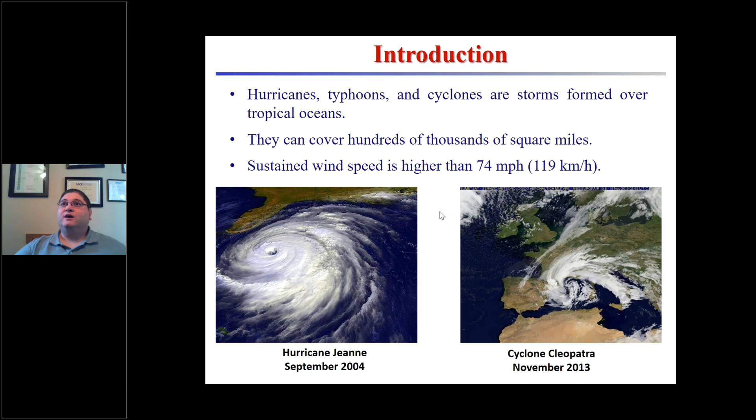Just a little bit more background. In order for hurricanes to form, we need to have warm ocean waters with a temperature of at least 78 Fahrenheit. They need to be at least 5 degrees north or south of the equator. There has to be low vertical wind shear, and a lot of moisture, because the moisture is what produces the fuel for the hurricane in order to gain strength.

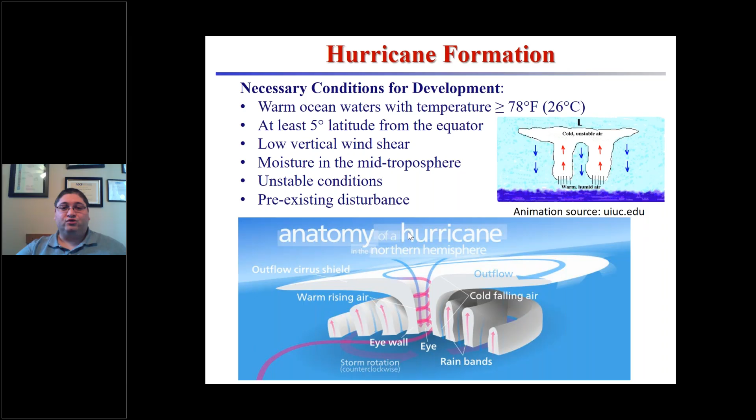There also has to be some initial disturbance and instability in order for the wind and the moisture to get enough structure to start rotating and producing what we know as a hurricane.

In terms of classification, hurricanes are generally classified using the Saffir-Simpson hurricane scale, which divides hurricanes into 5 different categories based on the maximum sustained wind speeds, going from 1 to 5, from lower strength to higher strength.

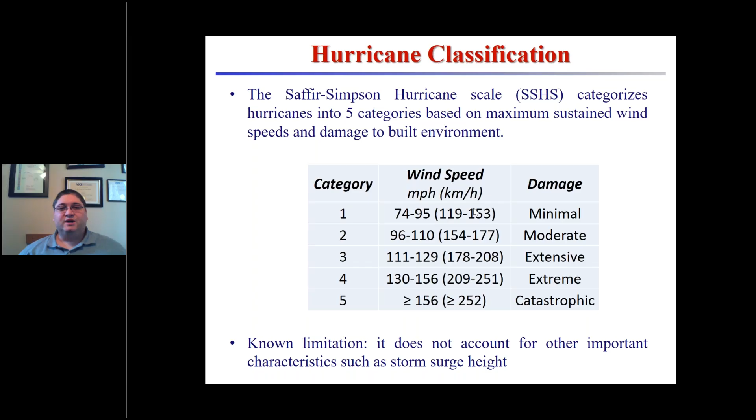One of the known limitations of this classification is that it's based only on wind, but a lot of the damage and danger coming from hurricanes is actually due to the storm surge and the storm surge height, which can produce flooding.

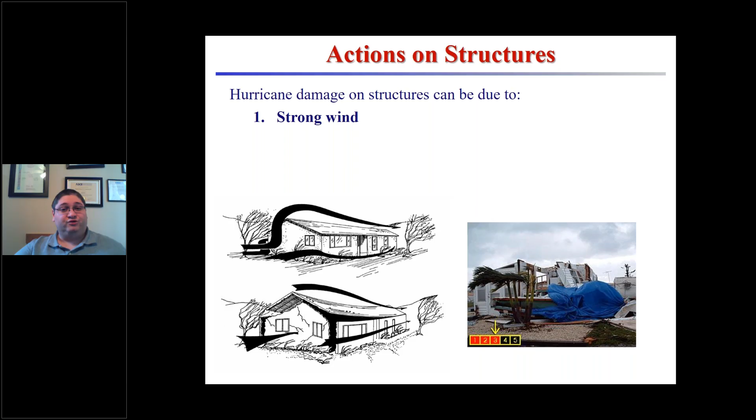So what are the effects of hurricanes on buildings and structures? There are several ways in which hurricanes act on structures. Obviously, we have the strong winds that produce strong pressures on walls and roofs of buildings. This pressure produces forces and moments, and can produce structural damage or also non-structural damage on the envelope.

Then there is the damage produced by windborne debris and their impact on the structures. Obviously there is penetration of windows, doors, garage doors, but the other important effect of windborne debris is that once the envelope of the structure is breached, we change the pressure distribution inside the building, and that completely changes the load path of the forces on the structure. If the structure was not designed for this new load path, we have failures.

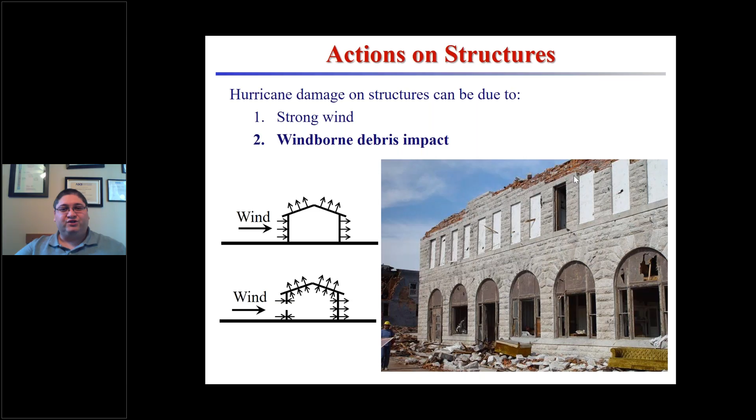Like in this picture, you can see that there was breaching of all of this glazing from the windborne debris, but then that produces the roof to blow off due to the change in internal pressures.

The other very dangerous component of hurricanes is the storm surge, which can produce flooding. Usually flooding is the issue that is most dangerous in terms of life losses, because if someone didn't evacuate and is having flooding in the streets, then they are literally stuck in the house, which makes it extremely dangerous for their survival.

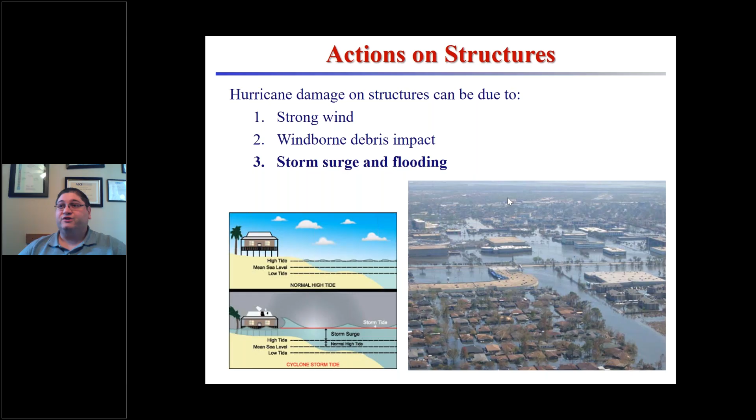And finally we have rain, which per se is not really dangerous in terms of life losses, but is one of the major sources of losses in terms of content and the interior of buildings. Once you have water inside your house, you are pretty much obliged to tear it down and rebuild it from scratch.

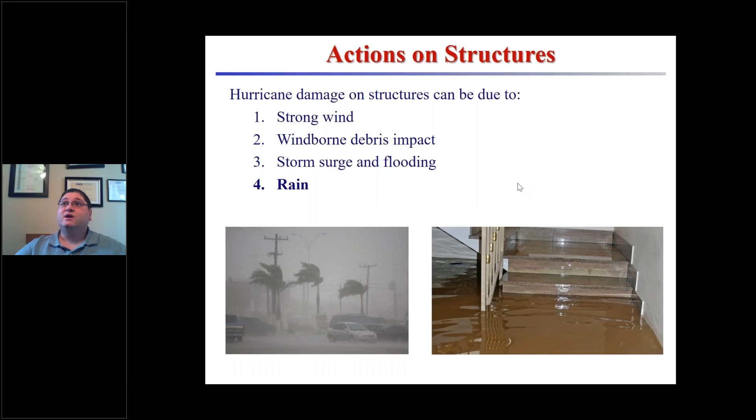So in order to assess the performance of a structure, we really need to consider these 4 different hazards that are interacting. On the other side, we also have quite abundant knowledge in terms of approaches for performance-based engineering. Obviously, performance-based earthquake engineering is the most well-known and the first performance-based approach developed for structural design and assessment. But then performance-based blast engineering, performance-based wind engineering, and performance-based fire engineering were also developed with similar characteristics, and performance-based fire and wind engineering are now accepted in design codes and ASCE 7.

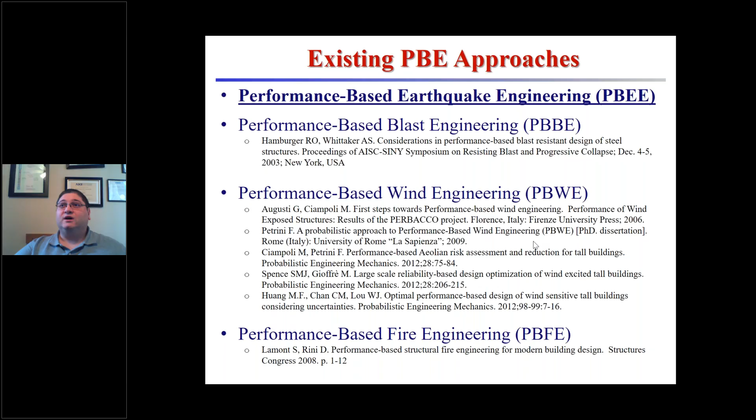In fact, very recently, less than 2 years ago, we had the first pre-standard document for performance-based wind engineering, and this document goes through the different methods of analysis that can be used to apply performance-based wind design, the definition of R modification factors, and how and when to use them. This document will actually be called directly in the ASCE 7-22 version of the code for load calculation on structural, building, and non-building structures.

So there is a lot of interest in having a methodology for performance-based wind design and performance-based hurricane design. And that's really the motivation and the objective of my research in this field.

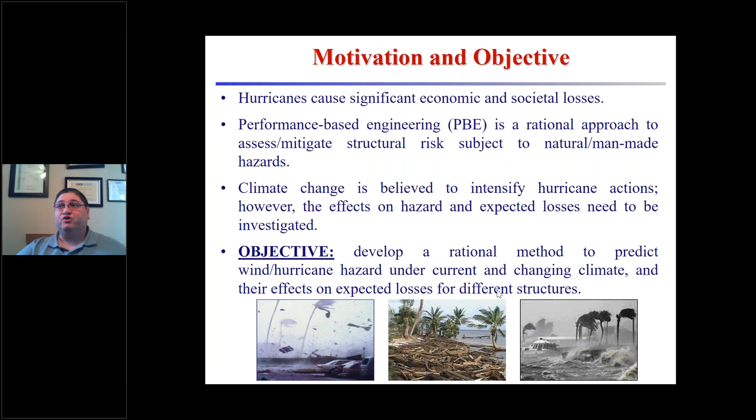We know that hurricanes produce significant economic and societal losses. On the other side, we know that performance-based engineering has been very successful as a rational approach for the assessment and design of structures subjected to different types of hazards. So the idea is to put them together and develop this performance-based hurricane engineering framework, which also allows us to include other effects like the effects of climate change, when the hurricane actions are expected to intensify in the next 30 to 50 years. And we need to have a methodology to actually evaluate, assess, and measure what that would imply in terms of losses on our built environment.

The methodology for performance-based hurricane engineering is based on, or inspired by, the Pacific Earthquake Engineering Research Center performance-based earthquake engineering framework, shown here in its mathematical form. This approach is really an application of the total probability theorem, a divide and conquer approach in which the difficult task of making a design based on the performance of the structure is broken down into simpler and independent steps: hazard analysis, structural analysis, damage analysis, and loss analysis, that are able to incorporate the effect of uncertainties in each of the different steps, and also allow different expertise to be used in different parts of the analysis and design.

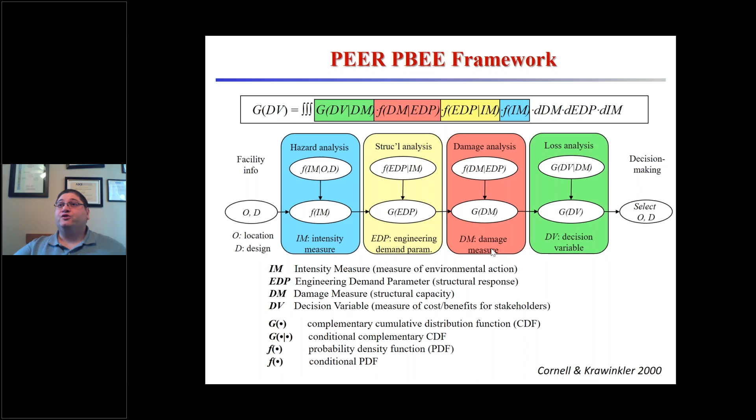So what are the differences then between the proposed performance-based hurricane engineering and the existing performance-based earthquake engineering methodology? The commonality is that they are both based on the total probability theorem, so we still want to break down a difficult problem into more tractable, smaller problems.

However, hurricanes are by their nature multi-hazard scenarios. As we have seen before, you need to include the effect of wind, windborne debris, storm surge, and rain, and they have different ways of interacting with one another. Also, we want to have a methodology that is consistent with the already existing performance-based wind engineering framework. It should actually be a generalization, because wind is one of the hazards within a hurricane, and we need to be able to include these different hazards that are interacting.

For the specific case of hurricanes, we have synchronous hazards—they are happening at the same time—and we have cascading hazards, or hazard chains, where the damage produced by one of the hazards can change the risk associated with one of the other hazards. So we need to have something that is able to model this in order to really consider the effect of hurricanes.

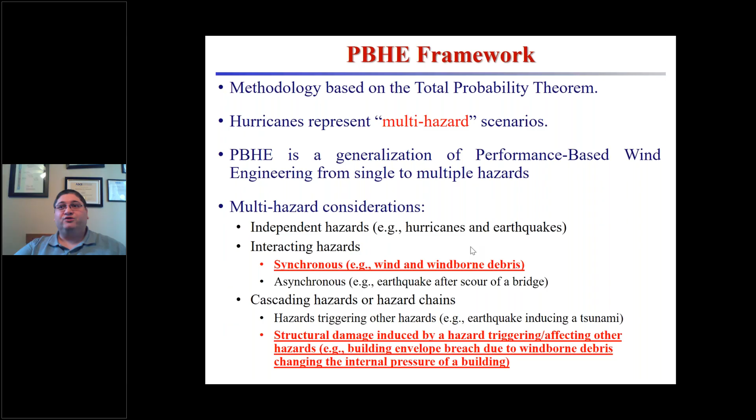The mathematical formulation is maybe a little bit scary because mathematically it's a quintuple integral of all of these functions. But if we break it down into their components, we see that it's really very similar to the performance-based earthquake engineering methodology that already exists, in that we have structural analysis, damage analysis, and loss analysis that bring us to making design decisions. The differences are in the first part of the methodology, the hazard analysis, where obviously we have to consider this interaction among the different hazards. And then we have two different steps that were not in the original performance-based earthquake engineering methodology: the structural characterization and the interaction analysis.

These are typical of wind engineering analysis of structures. The structural parameters identified during the structural characterization are those mechanical parameters, or parameters representing the characteristics of the structure, that have an effect on the loading that the structure is seeing—things like natural period, pressure coefficients, shape of the building. These are all parameters that change the load applied on the buildings when you have the same characteristics for the wind.

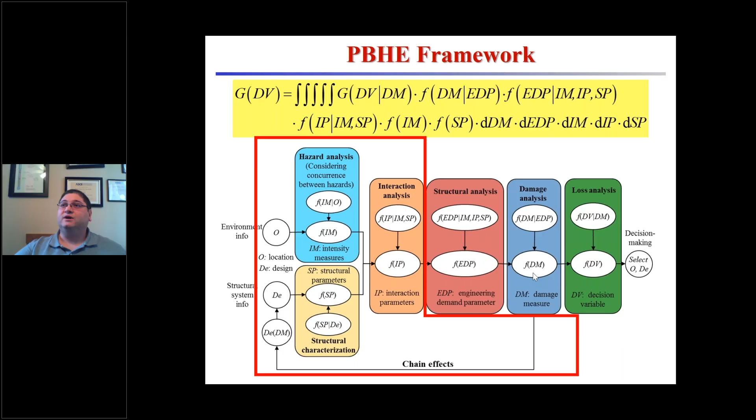And so that's really the mathematical formulation of the methodology that then needs to be implemented. For the examples that I'm presenting in this presentation, the implementation is a multi-layer Monte Carlo simulation, which is a combination of stochastic simulation to implement the variability of the different parameters, followed by analysis steps where deterministic models like windborne debris trajectory analysis, or finite element models of the structures, are used to propagate the uncertainty from one step to the next.

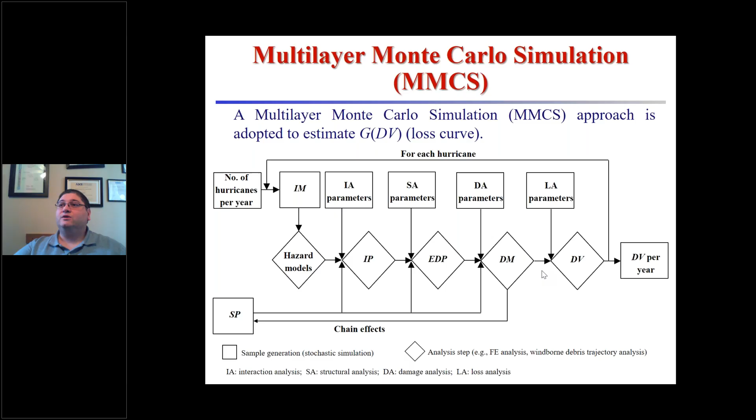Given this general formulation, I want to now show how it is applied in practical usage for structural design. The first example is the performance-based comparison of different storm mitigation techniques for residential buildings, specifically single-family houses.

The case study is this little house, identified by the red circle. It is an actual gable roof structure with shingle roof covering, located in Pinellas County, Florida, within a real residential development of houses that are very similar to each other. We made assumptions on the value of the structure and its contents in order to represent everything in dollars, something that can be easily presented to an owner to indicate what is a good idea for improving the performance of the house.

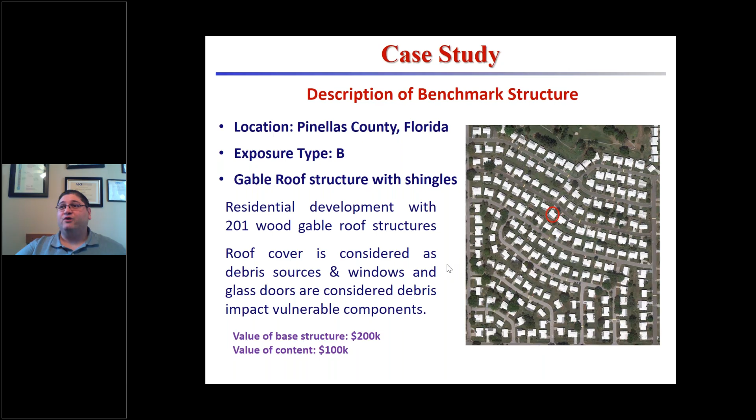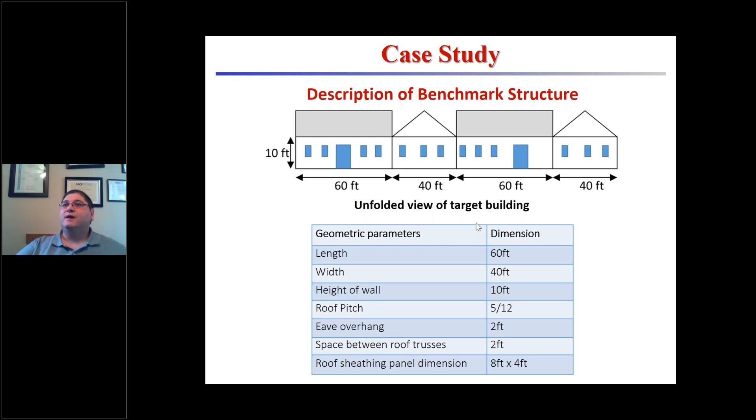Then we go through our methodology. We start with the intensity measure for this residential unit. The distance from water bodies was sufficient to eliminate practically any risk of flooding, so we are really focusing on the damage produced by wind and windborne debris. Our intensity measure is obviously the wind speed at the location.

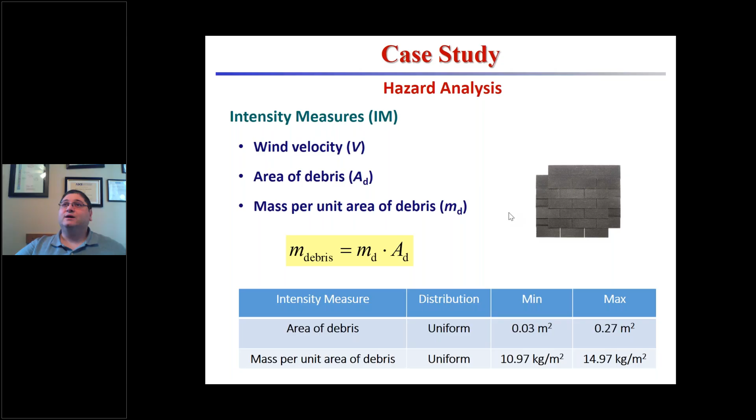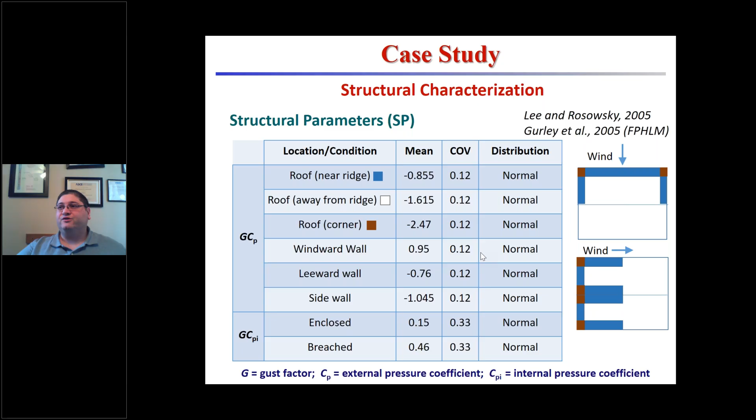We need to describe the risk related to windborne debris. We took these values from literature information available for the type of construction we were considering. Then we have our structural characterization, describing the pressure coefficients for the given structure, and we need to understand the real variability of these parameters depending on the direction of the wind and on the location on the roof and the different sides of the building.

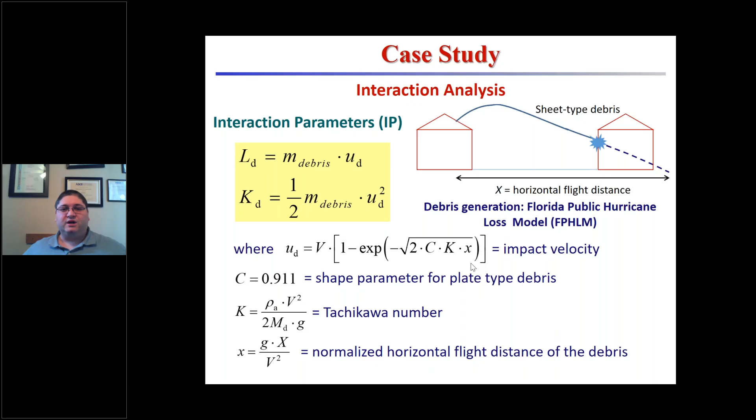Then we have our interaction analysis, where we calculate the loads applied on the structure. From windborne debris, we calculate the linear momentum impact and the kinetic energy at impact. The first parameter controls the performance of glazing, windows, and doors, which are brittle in nature. The second parameter controls the behavior of steel or aluminum protection storm panels.

We also calculate the wind pressures on all surfaces of the building. You will probably recognize the ASCE 7 equation for calculating wind pressure. The only difference is that all of these parameters are really random variables, described by distributions rather than a single design value.

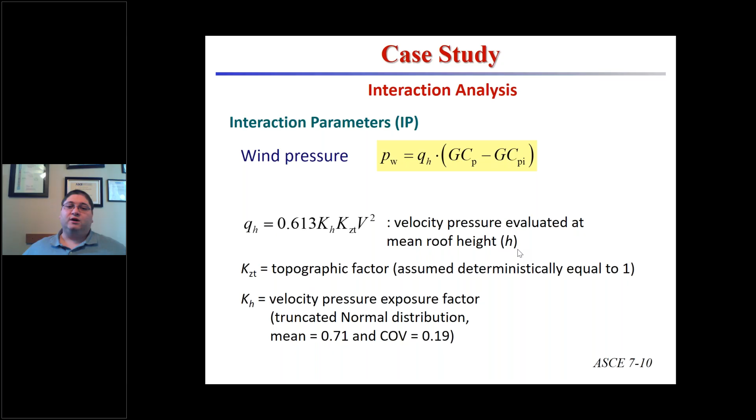Once we have determined and characterized the loading on the structure probabilistically, we also need to characterize the strength of the different components, going through all the different failure modes, including pull-off of the roof cover, the roof sheathing, and so on.

Again, these are data taken from the literature, sometimes obtained from direct testing of the components, and other times obtained from insurance claims data, then back-engineered to obtain numerical values.

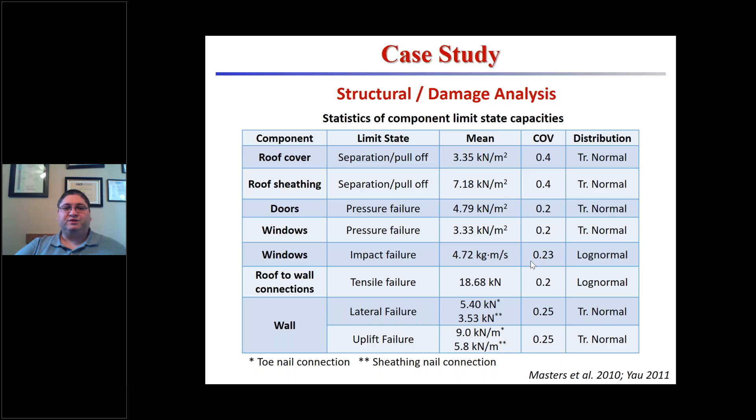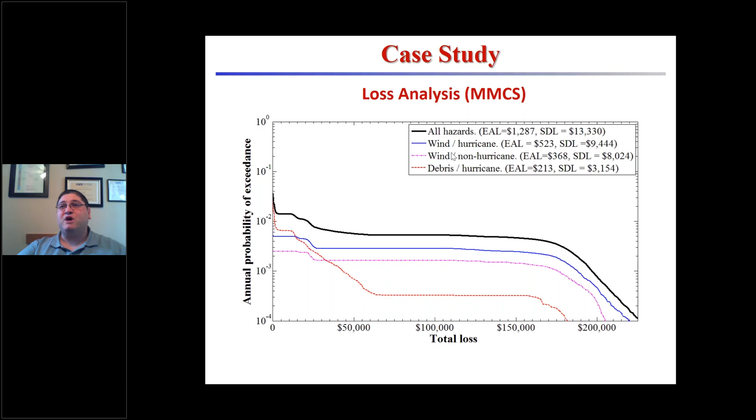But when you actually include the interaction among the different hazards, that's a little bit higher, about 20% higher. So you really need to include the interaction among the different hazards. You cannot just analyze them independently and then sum up their effects.

Now we need to go to the retrofit. This is our base structure without any retrofit. We considered 4 different strategies for retrofit or redesign: the addition of aluminum hurricane protection panels, changing the asphalt shingles to clay tiles as a roof cover, considering 3 different roof sheathing nailing patterns of increasing strength, and substituting completely the walls and structure from a wooden light frame structure to a masonry structure.

For all of these different strategies, we considered also their interaction and combination, giving a total of 24 different design and retrofit schemes. And for each of those, again, we had to evaluate the characteristic and the variability of the strength.

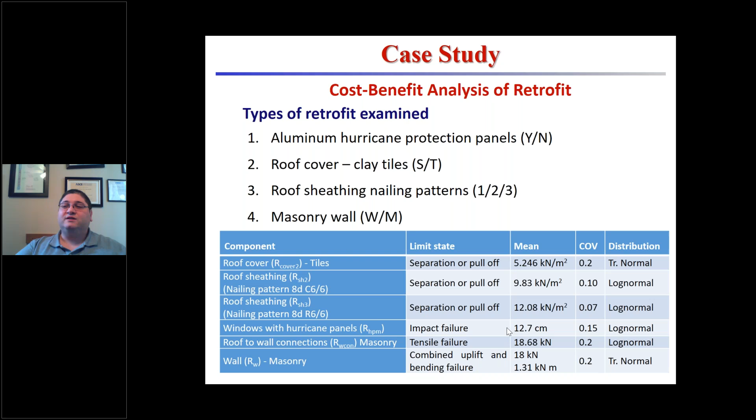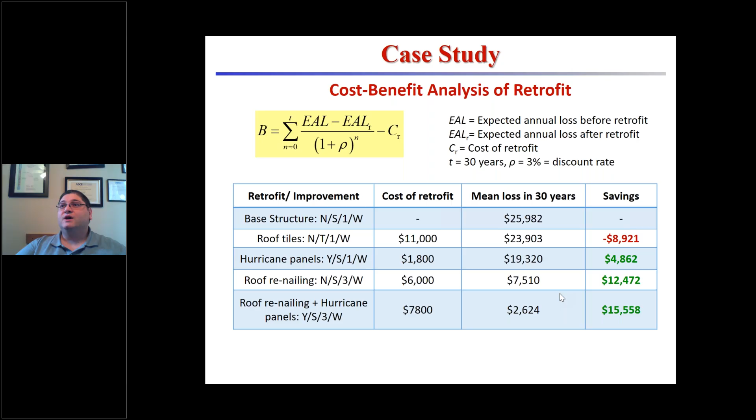We used all of this information within a cost-benefit analysis procedure. We calculated the benefit obtained by producing this retrofitted structure with a value that is discounted over a 30 years life cycle for the design lifetime of the structure. And we subtracted from those benefits the initial cost, the initial investment needed to obtain that reduction in losses. And this gives us an actual tool to decide what to do with the house.

So you find probably something you were expecting: increasing the strength of the roof is very beneficial, and adding storm panels on all of your windows is also very beneficial. The cost of tiles is usually not justified only by considering the cost-benefit analysis. So if you like tiles instead of shingles, it's not an economic decision, it's more an architectural decision.

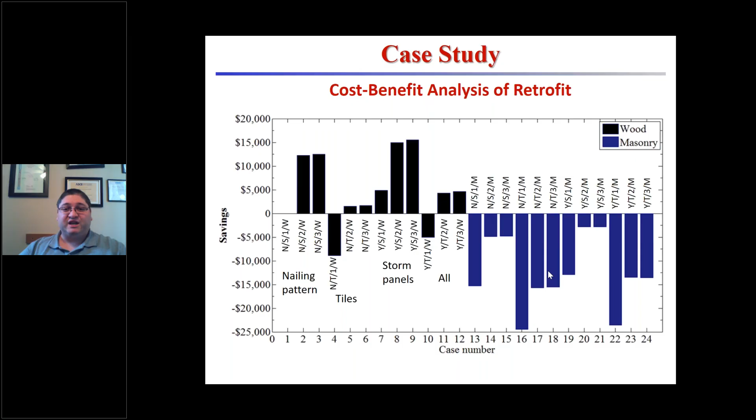And for this specific house, in that specific location, using masonry construction is not justified only from a purely economical consideration. This obviously changes from house to house and from location to location, but it gives you a very clear snapshot of what you can indicate to the owner in terms of how to improve their house in a way that makes sense from an economic point of view.

So I'm going now with my second application, which is for structures where a more detailed analysis is warranted. We are talking about tall buildings, for which again we need to go through the entire procedure. In this case, we have to do it a little bit more carefully because we want to be able to model our structure in detail with finite elements.

These are structures that usually are connected with pretty high values and costs. So here there is a description of the hurricane wind field, with an average wind speed acting in the along-wind direction, plus the turbulence that is acting in the three different directions.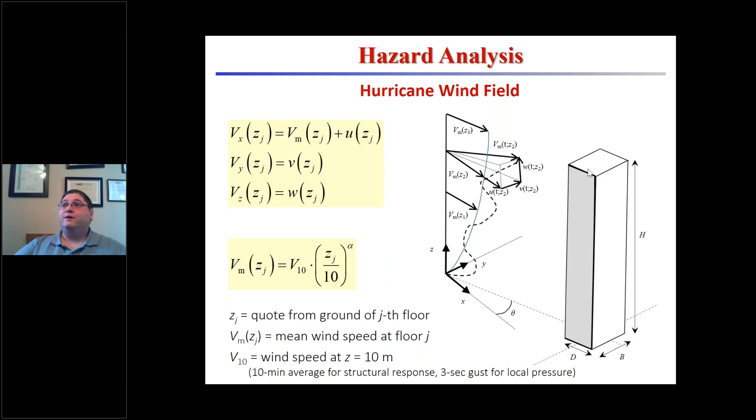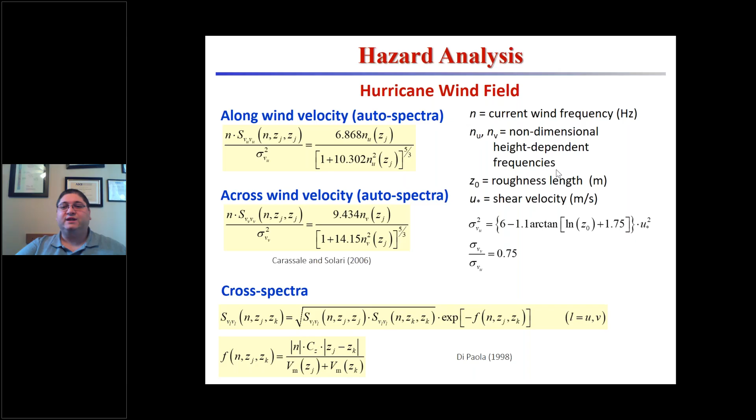We can represent the variability of the turbulence using a frequency domain representation with auto spectra and cross spectra. Not going to enter into the mathematics of all of this. These are known spectra taken from the literature, representing the characteristics of the wind speed in the across-wind and along-wind directions for our building.

And then we need to make our structural characterization. We are interested in three sets of parameters: geometrical properties, which, if the building already exists or if you are designing the building, are usually characterized by small variability. In my analysis, I'm actually considering the geometric properties as deterministic, because the final result is not really influenced by their small variability. Then we have mechanical properties like natural period and damping ratio for the different frequencies of vibration.

This is done using direct vibration measures if the building already exists, or it can be estimated using a finite element model of the building. And then the intensity of the wind effects, which are also random, like internal and external pressure coefficients and gust effect factors, which for the specific application I'm presenting here were obtained directly from wind tunnel tests.

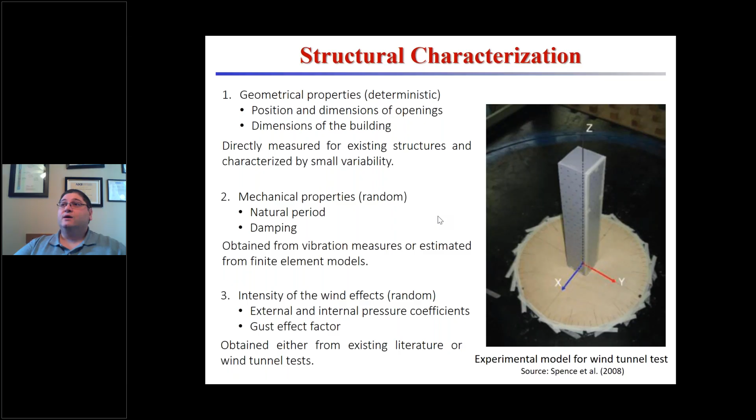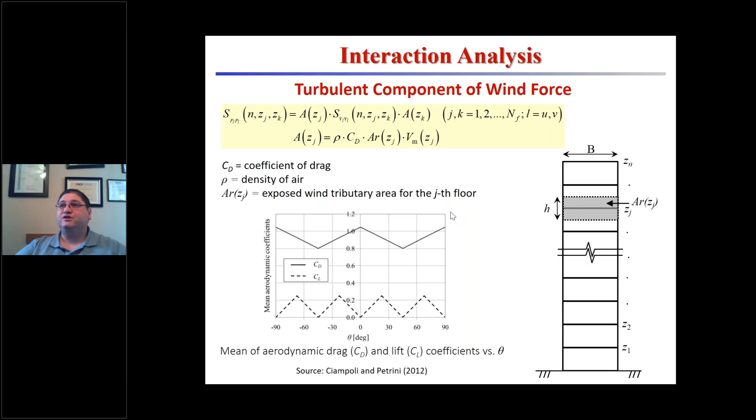All of this allows us to describe the forces applied at the different floors of the building. These depend on the direction of the wind relative to the building and the geometry of the building. From these forces, we can obtain the forces in the along-wind and across-wind directions.

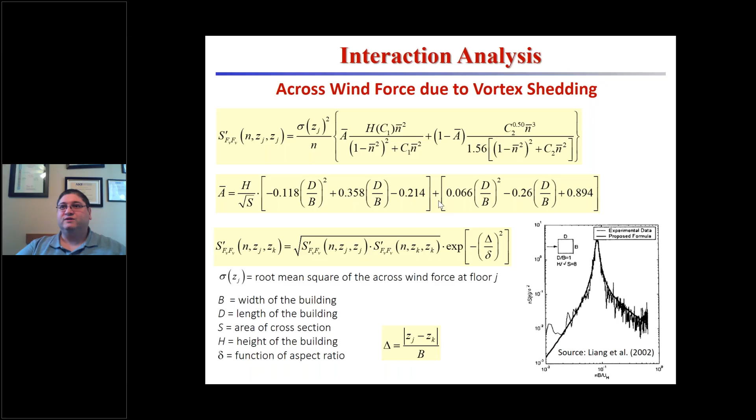In the across-wind direction, we need to include the effect of vortex shedding, which is prevalent near the natural period of the structure. We also include the effect of wind pressure on cladding, since a lot of the damage on these buildings can be produced by the failure of glazing and cladding.

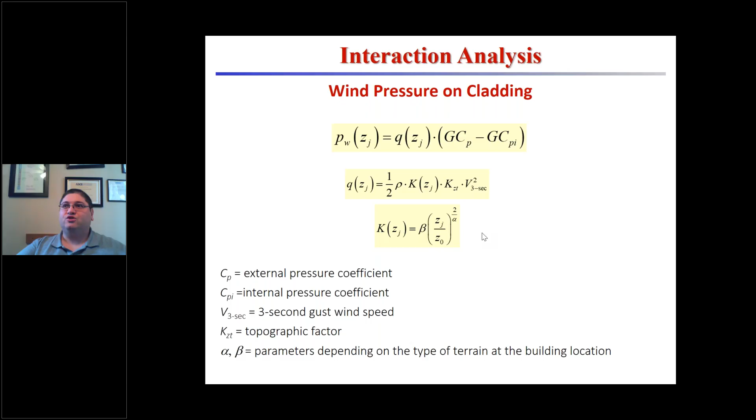Again, we use the same equation as before from ASCE 7, with a slight difference: the wind speed used for the entire structure is averaged over a different time than the wind speed used for the cladding, because of how wind pressure is averaged over larger or smaller surfaces. For the cladding, you have higher wind speeds because of the more localized characterization of pressure on the cladding. We do our structural analysis.

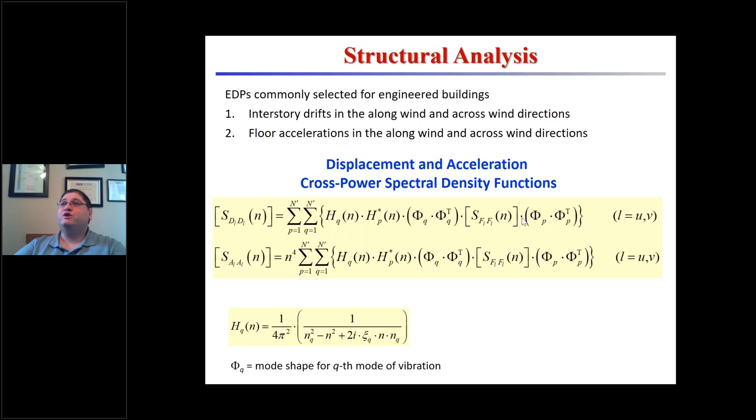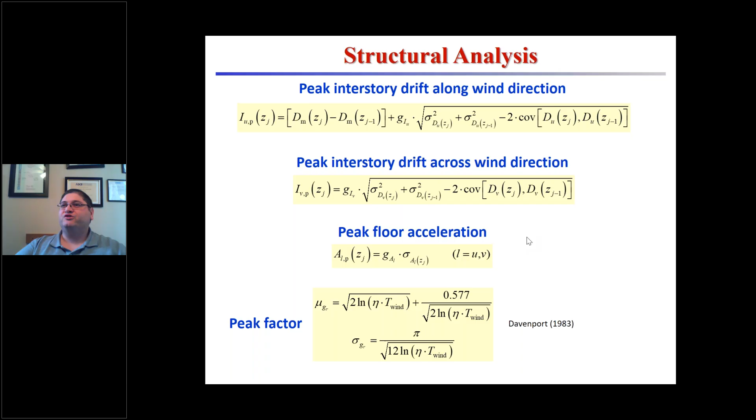We are using the Davenport equation, which assumes the process to be stationary and Gaussian. The process is not rigorously stationary and Gaussian, but this is a simplifying and reasonable approximation for our problem.

Then we need to go from the response of the building to the damage and loss analysis. We have considered a story-by-story approach with 4 different types of limit states for structural drift-sensitive components. These represent the structural damage produced by excessive wind.

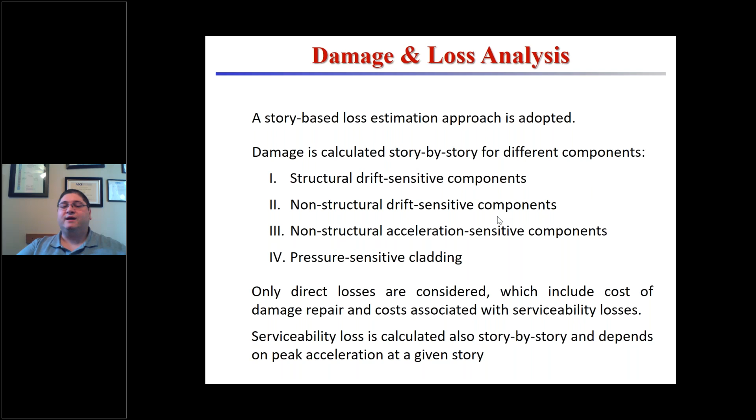Then non-structural drift-sensitive components like partitions and cladding. Non-structural acceleration-sensitive components, referring to the content of the building. And then pressure-sensitive cladding, as well as serviceability losses due to excessive vibration and discomfort of the occupants.

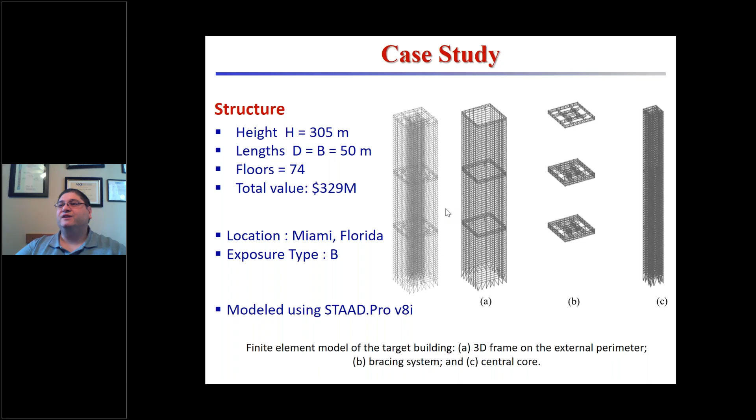The specific case study we are considering is a 74-story building with a total value of 329 million dollars, located in Miami, Florida. This is our linear elastic model for the structure, with a central core and a bracing system connecting to the external perimeter of a 3D frame.

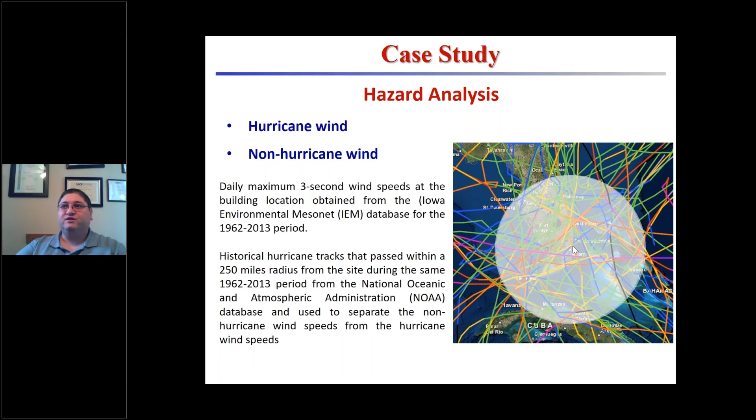We went through a detailed analysis of the characteristics of wind speed at the location by tracking all of the hurricanes that passed through Miami, finding the distribution of wind speed conditional to hurricane and conditional to non-hurricane conditions, and then combining them.

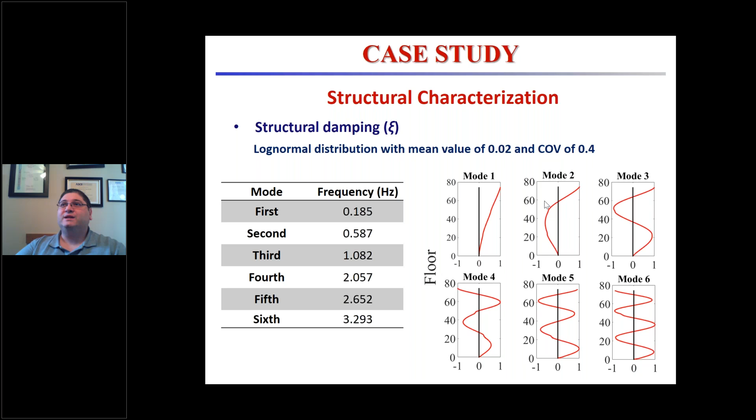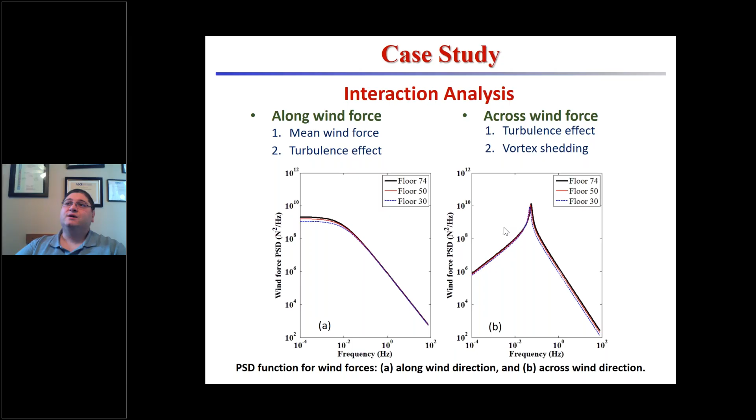We analyzed the structure, characterizing it by finding all of the modes of vibration in both directions. The structure is symmetric, so these results are shown for one direction. Then, with the interaction analysis, we evaluated the power spectral density function for the loads applied at all the different floors of the structure in the along-wind and across-wind directions.

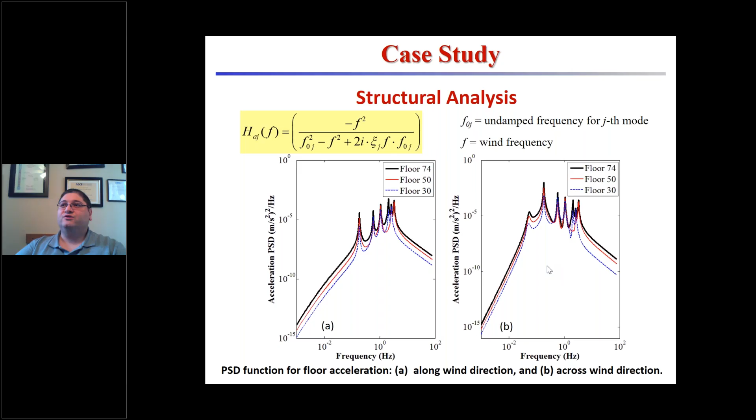From that, we obtained the response in terms of displacements in the two directions and accelerations in the two directions. We then plotted the results of our Monte Carlo simulations in terms of maximum recorded displacement at each floor and maximum recorded acceleration at each floor.

However, in terms of acceleration, we get exactly the opposite. Our building, which is so stiff in order to remain elastic during any type of wind loading, has a lot of vibration, particularly in the crosswind direction, with a strong effect of vortex shedding.

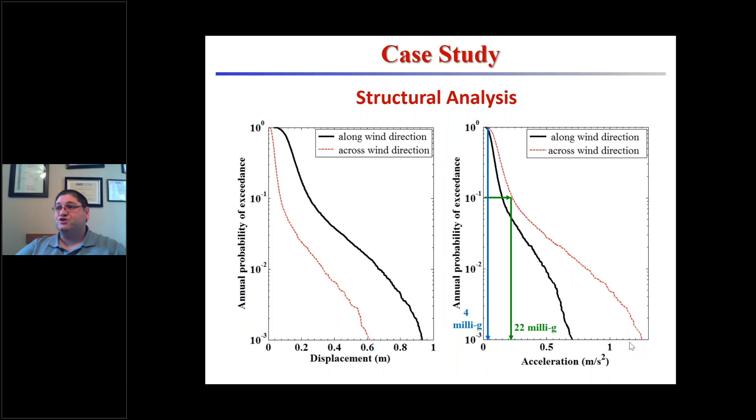We know this is producing a bit of a problem, because the maximum acceleration on the roof with a return period of 10 years is 22 milli-G, which is a little beyond the typical limit of 20 milli-G considered acceptable for that level of wind speed. Also, in the crosswind direction, with a return period of 1,000 years, we see very severe acceleration, more than 1 meter per second squared.

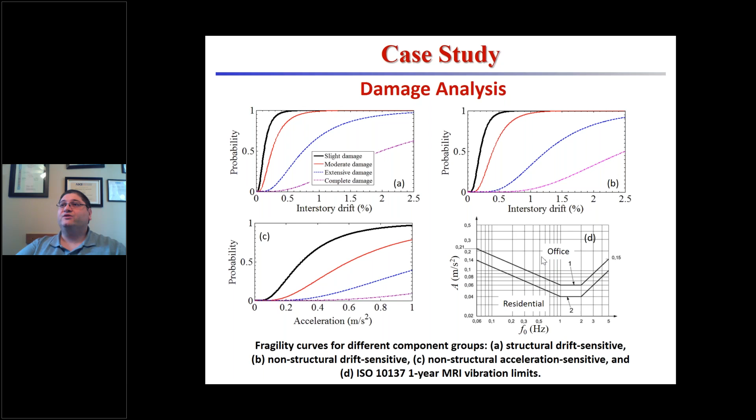So then we apply this through the damage analysis. We have our fragility curves, similar to what we would have in earthquake engineering, for our structural components that are drift sensitive, for the non-structural drift sensitive components, for the non-structural acceleration sensitive components, and then for the comfort of the occupants. We obtain similar results to the ones we obtained before in terms of annual probability of exceedance of a given value of the loss.

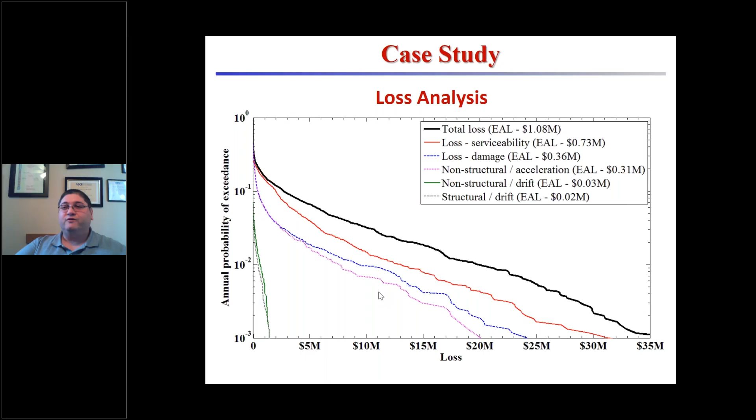I'm not going to present the results for this building, but we also considered the usage of different damping systems applied to the building in order to bring down the expected losses and have better performance for the building. These are the type of information that can be used to improve our design, also this type of structures. I'm going to conclude because I think I'm already a couple of minutes beyond my allotted time.

So we have described a performance-based hurricane engineering framework based on the total probability theorem and on methodologies that already exist for other civil engineering subfields. But we have extended this methodology to situations including not only hurricane hazards, but mainly the fact that you can consider multiple hazards acting at the same time. And there are two applications: performance of different storm mitigation techniques and design alternatives for single family houses, and also loss assessment of tall buildings for improvement of the design.

The main information is that this proposed framework can be used for important structures, like that tall building, directly for performance-based design, but it is also very useful for calibrating design codes so that improved design can be done without having to go through all of the math and all of the methodology that I have presented here.